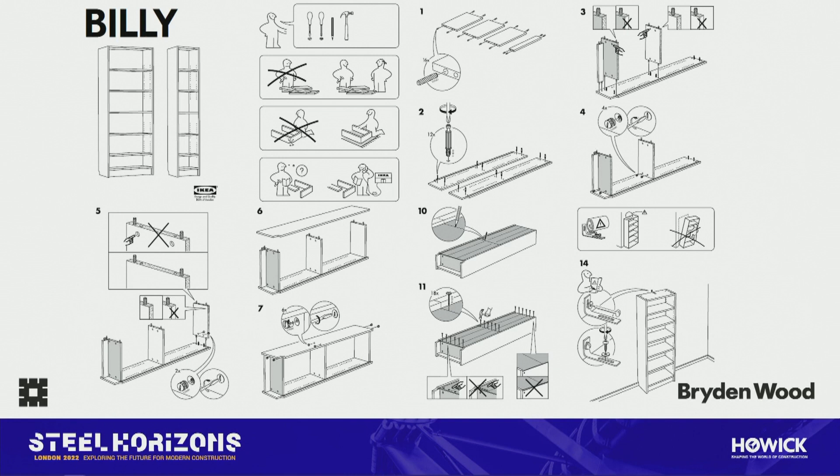No doubt many of you are aware of the Billy bookcase that IKEA has sold for years. They took the philosophy of, instead of building a bookcase themselves and transporting a large volumetric object, it was far better to reduce it down to components. This reduced the amount of storage needed in their warehouses and made it more transportable for the end user. It's simply erected when the end user takes it home, usually erected right next to the place where they need it. Bookcase, as we know, comes in several sizes, and it's generally only small components that need to be changed to alter its size and shape.

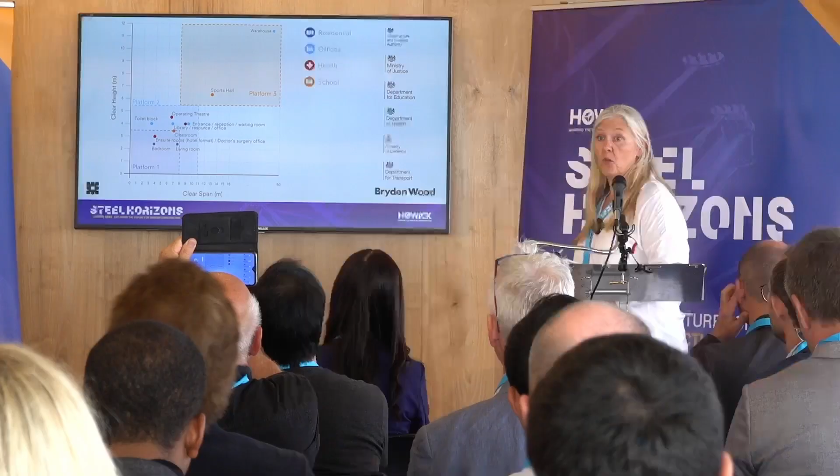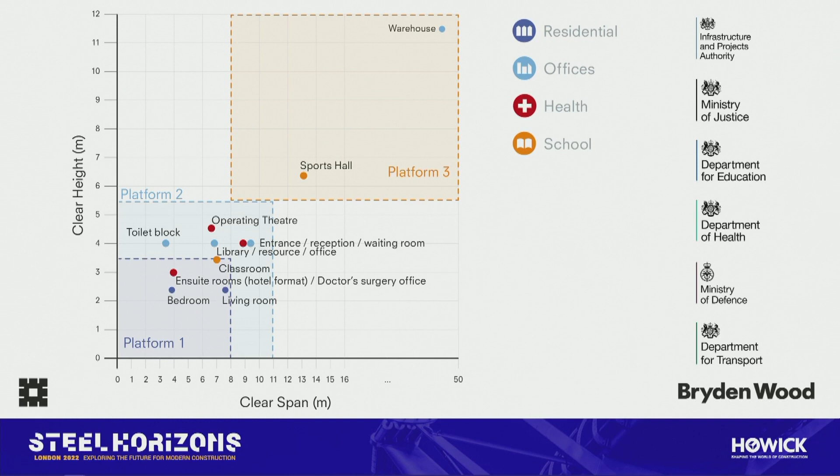So at Bryden Wood, we're taking that same philosophy and applying it to building types. Depending on the height and clear span of what's required for a particular building, it determines the type of platform that we can use. But as you can see, there's generally lots of overlap between the systems to provide flexibility.

By taking this approach, we're also in alignment with the government's roadmap for 2030. And as you see, we aim to create a kit of parts that can be manufactured in high volume and high quality.

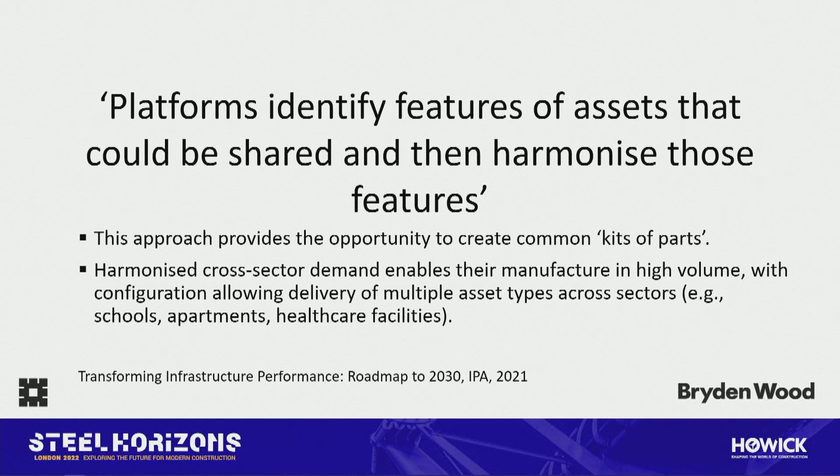But what are the benefits? So we find that we're getting less material, so the associated costs with that, the carbon, the transport, we've got fewer components. That gives us the economies of scale that we need, levels of optimization, the distributed resilient supply chains, and greater control of logistics and training on-site activities that we're all aware is quite a challenge at the moment.

And also we get standardised processes in manufacturing and assembly. So this enables us to have a diversification of the sector, so we can upskill non-construction personnel, which is very important in this market that we have, with challenges with getting the right personnel that we need. Improved health and safety, which is key. Increased productivity, reduced reliance on trades and workmanship, and promote automation.

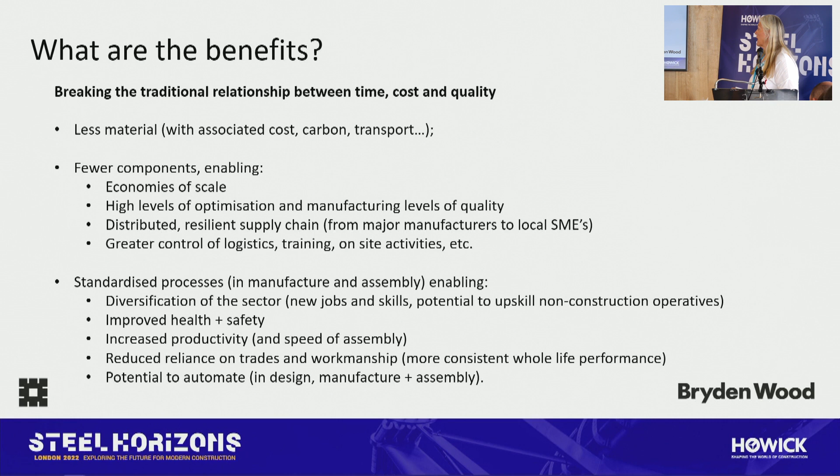So how does this actually apply in practice? Well, we are just currently coming to the end of our first project, really sort of pushing the boundaries on this in the Forge in London.

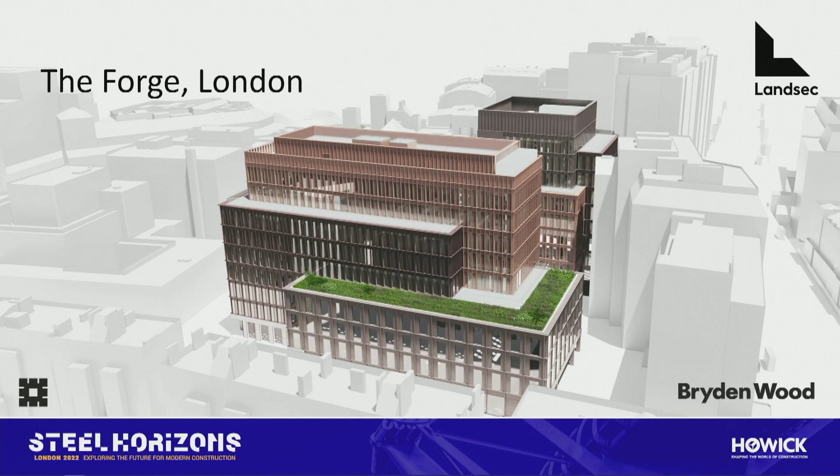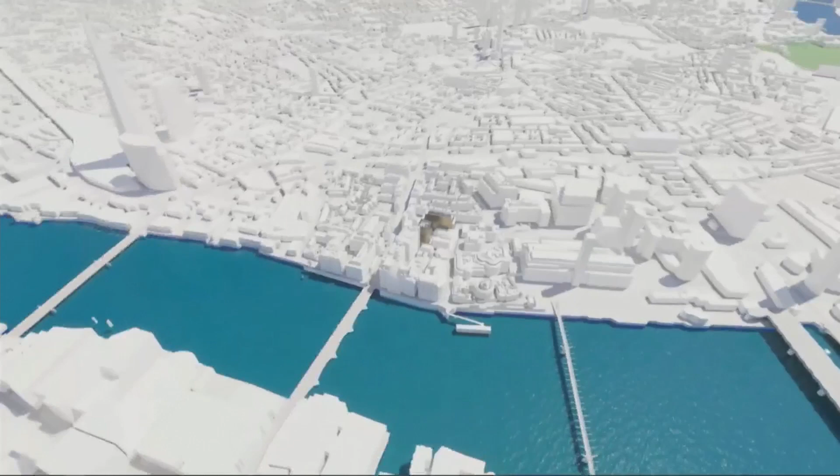The Forge is situated in Southwark, and it's a commercial building that we're just completing for Landsec. It's two buildings in a very, very tight site. As you can see from here, we are on the south bank, very close to Tate Modern, and as usual for anybody that knows construction in London, we are bound. It's really, really close boundaries on each side with really only one access.

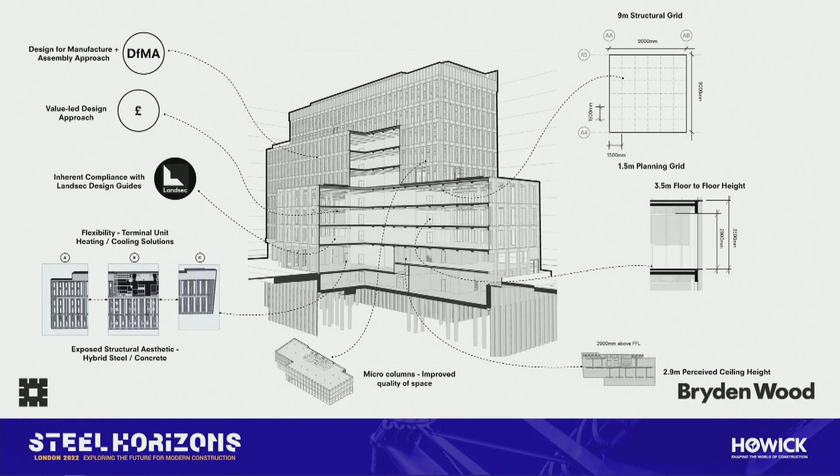So the kit of parts and the platform approach really suited this development. Not only was the approach DFMA led, but also design to value was a key driver too. We also had to ensure that we adhere to the requirements of the client, because they've got very, very strict design requirements that go to their end user. We also had a planning grid that we needed to adhere to, and also it had to be something that was flexible for the MEP that we're actually putting in it. So the platform approach really did allow us to carry on with what we needed to do.

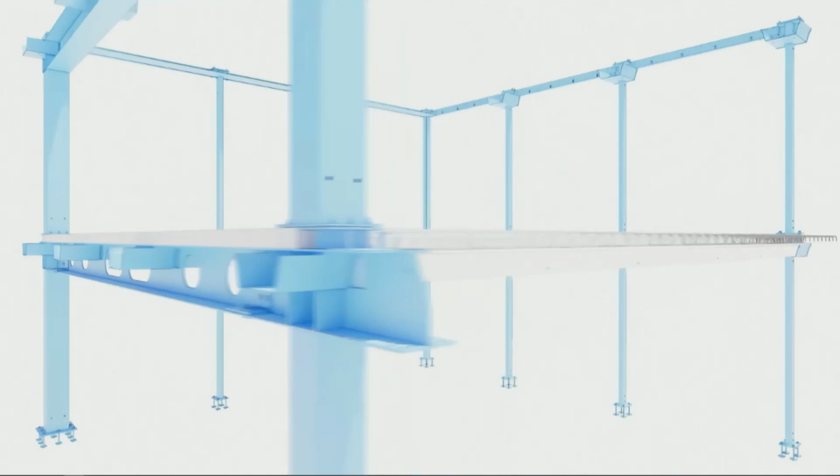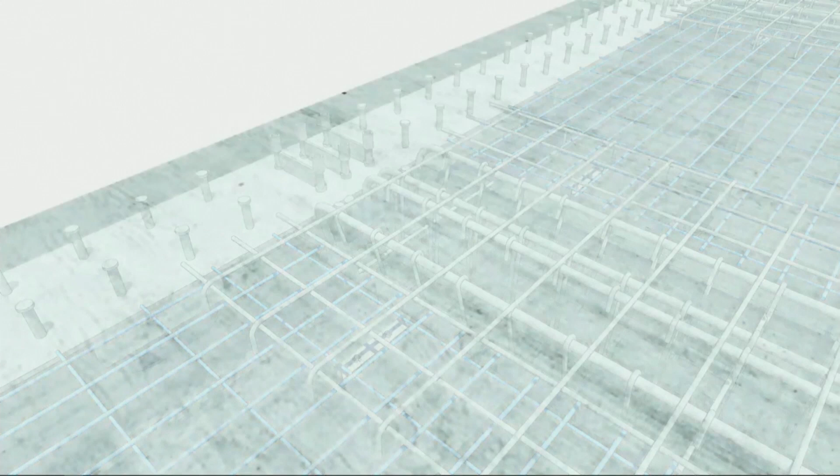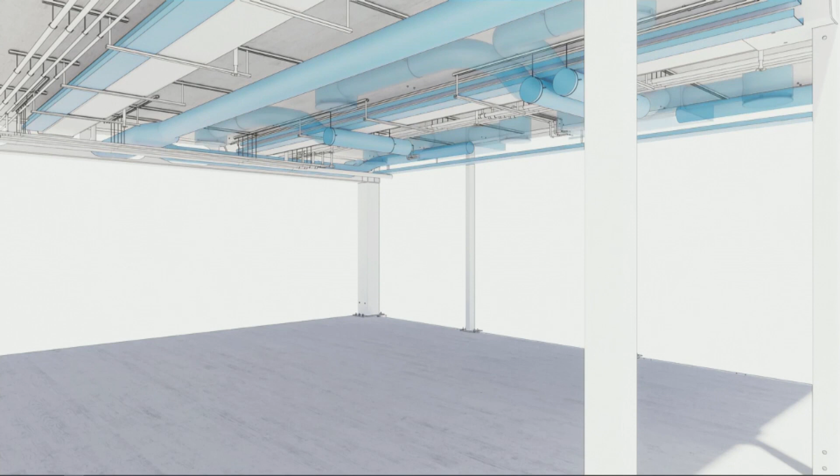So the actual system itself, the structural frame, just utilises very general construction products. The steel beams are fabricated with openings to allow the passing of services to reduce structural and services zone, shear studs to allow general composite action. But then we've got steel shoes that we actually fabricated on the beams that actually sit Comflor beams. So all that we're using is a general ComFlor lightweight decking, just in a different way, so that we've got a shutter, in effect, that we can put all the reinforcement in and just lift it into place.

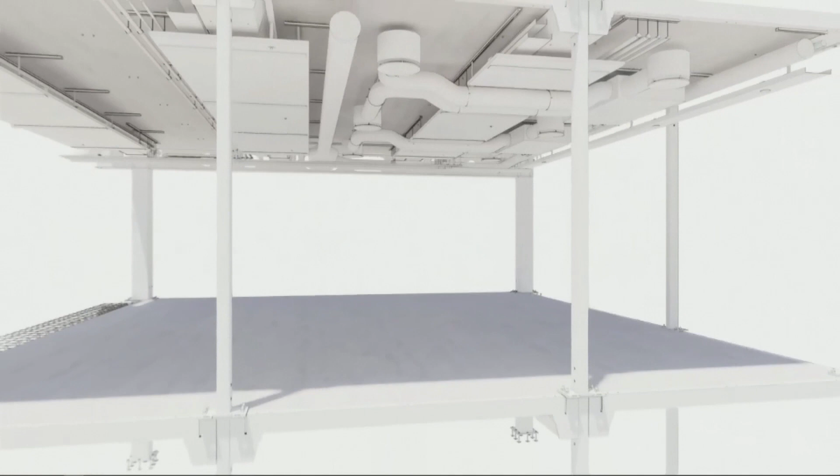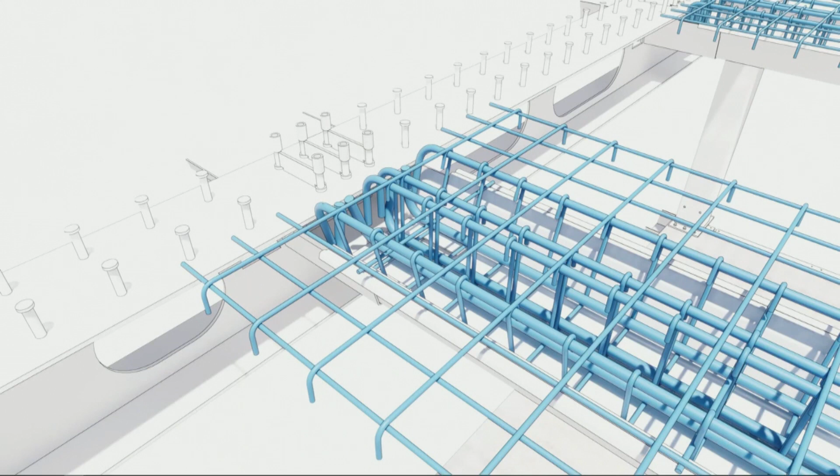Using the ComFloor in this way, the actual floor spans are reduced. So the floor slab reinforcement is then on in mesh, which actually went up with the shuttering system.

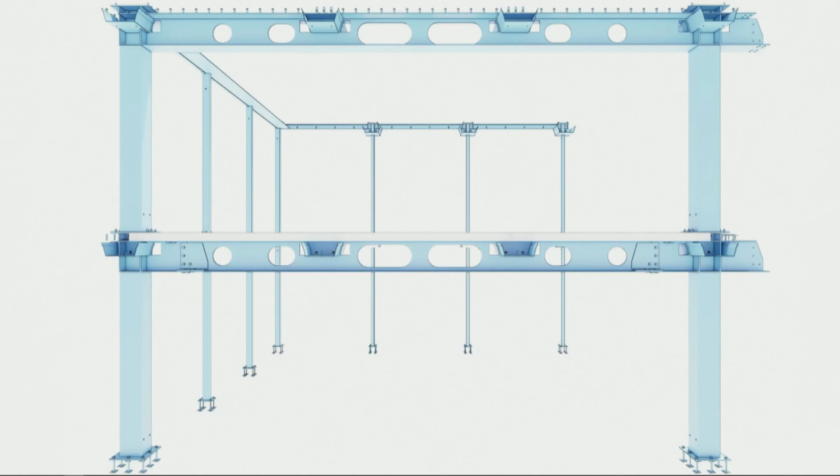The floor slabs were constructed with sockets already installed, which really sped up the MEP installation. The MEP was roughly in 4 different modules, keeping the repeatability. On an 8-storey building, this really sped things up, and once one floor was done, the operatives were straight on to the next. It was getting quicker and quicker. We've really had a lot of success with it.

Very, very narrow, but in a regular grid that was easily lifted into place. Nothing huge, and things the contractor is all familiar with. These are all construction products that we're used to every single day.

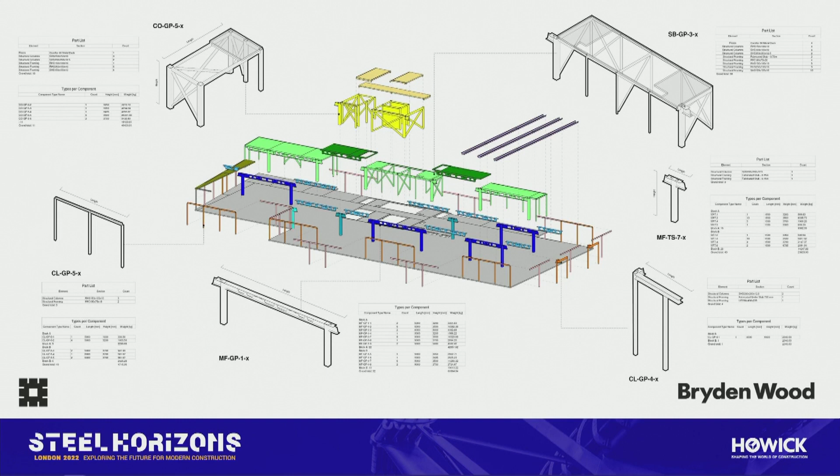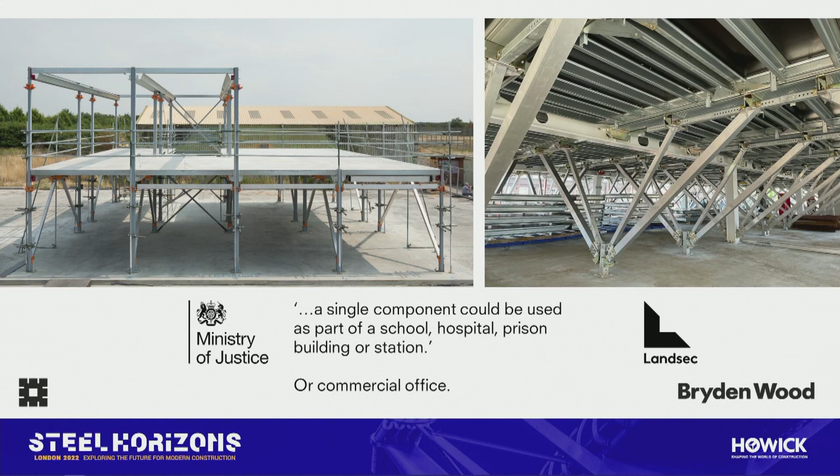As this was a new approach, we carried out several prototypes. Here on the left, you can see one of the first prototypes that we did with the actual Ministry of Justice. We worked with them to look at their prison portfolio to see how we could speed up construction for their new rollout. We actually worked with them using some prisoners at one of their facilities to give them skills and to see how easy it would be to train a non-skilled workforce, which was really great.

This image on the right is actually the forge, showing you the actual shuttering tables that I mentioned earlier. What we've done here is redesigned the shuttering to be reusable for every floor and for other buildings, but we've taken the propping back to the columns so that we're trying to speed up construction as much as possible.

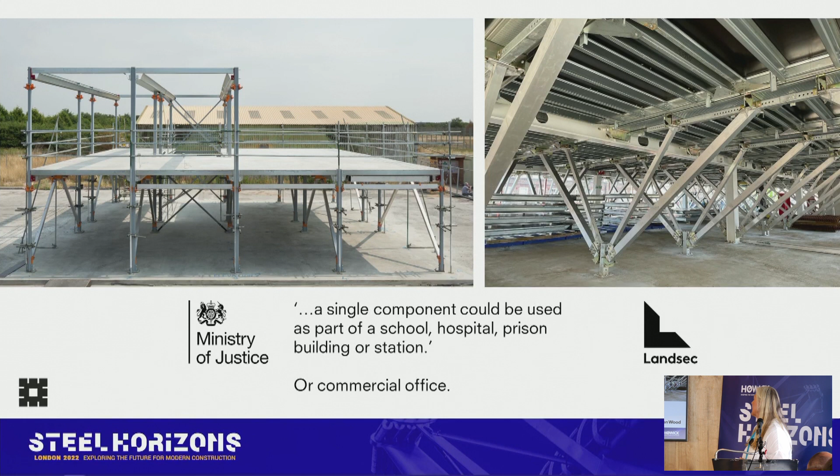This allows free open space along the floor plate, which really helps when you've got a lot going on and you're wanting to bring in materials, especially on a tight site. It gives you that freedom.

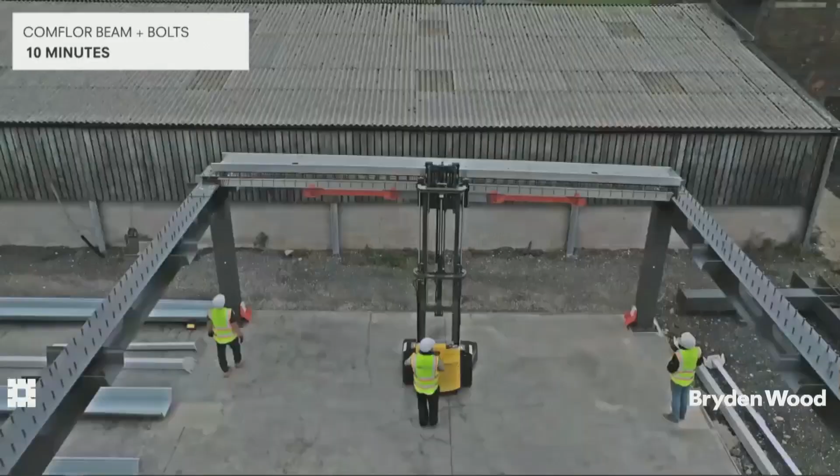Here's a video of us actually doing the prototype. These are called ridge stackers, lifting the Comflor beams into place, as you see on the shoes.

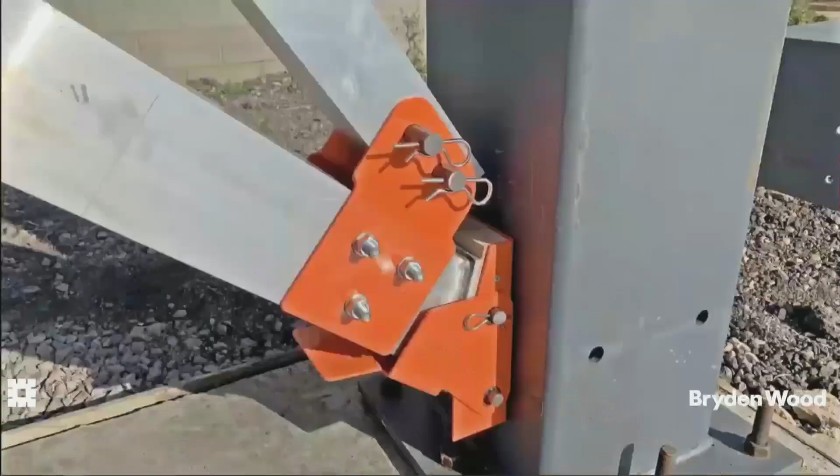The operatives putting the propping into place. As you can see, it's very light gauge steel that we're using here, with repeatable connections, so it can be put together easily and with little instruction.

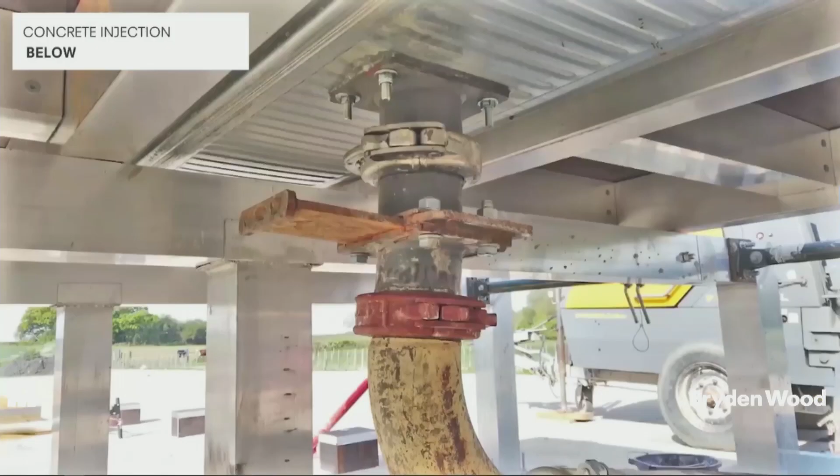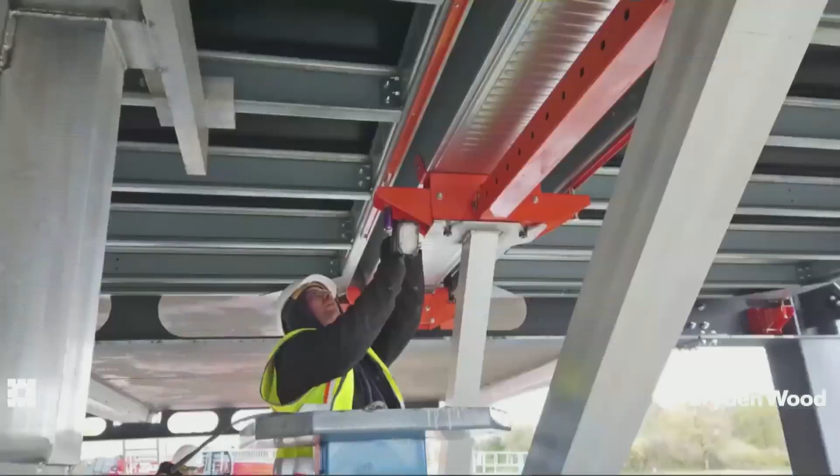These are the shutter tables going up with just the mesh on for the reinforcement. We found that actually pumping a wet mix from below was the best way to do it, to get a really nice finish, using an automated screeder. On the forge, we didn't - we just did it the traditional way.

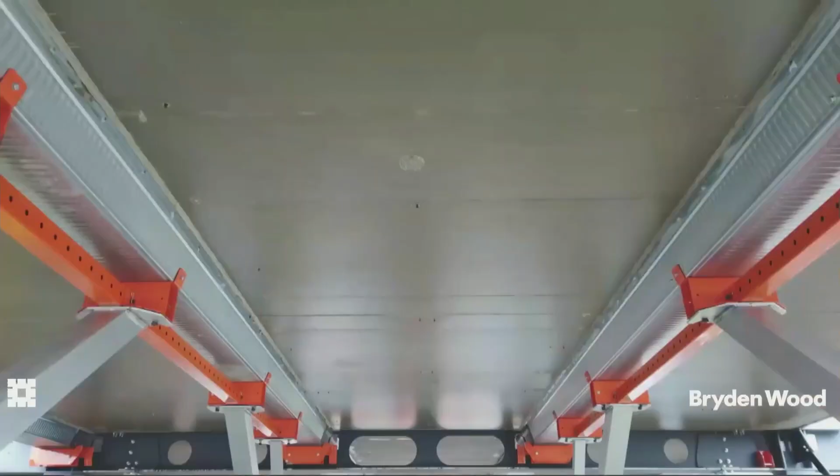As you can see, there's a lot of wet concrete going in there. You're thinking, well, why not maybe use precast concrete? We did analyse this, but you find that you're just transporting more volume to site - when we drill down to it, all this precast laid down in the yard, lifting onto a vehicle, transporting to site, lifting into position, it just didn't make sense to us. So we didn't proceed with it. We just kept to the wet concrete in that area.

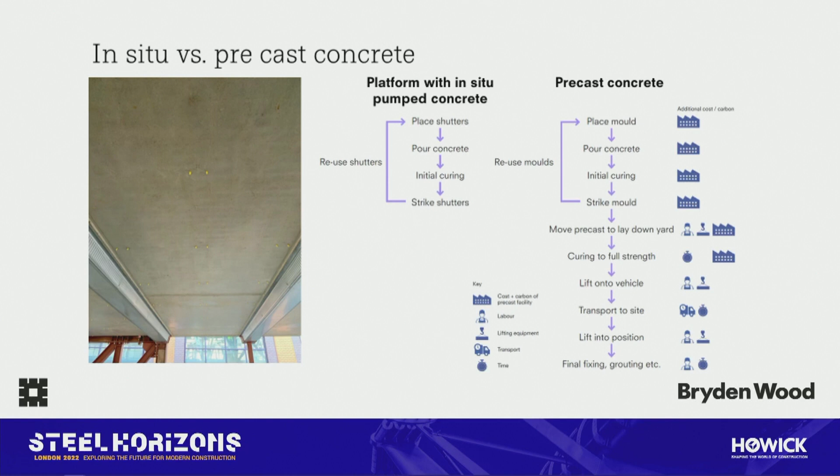The sustainability benefits are just great on this. You've got a highly optimized superstructure, so you can reduce the quantity of building materials, which gives you fewer transport movements. It has this really great knock-on effect - you're reducing your building weight, and getting smaller foundations.

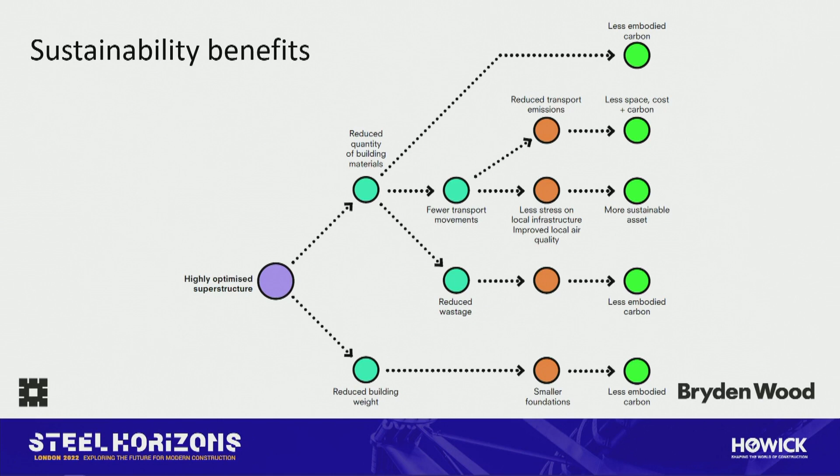Sometimes, especially when we're building in densely populated places like London, there are actually existing foundations there. You're possibly able to reuse foundations, which is great.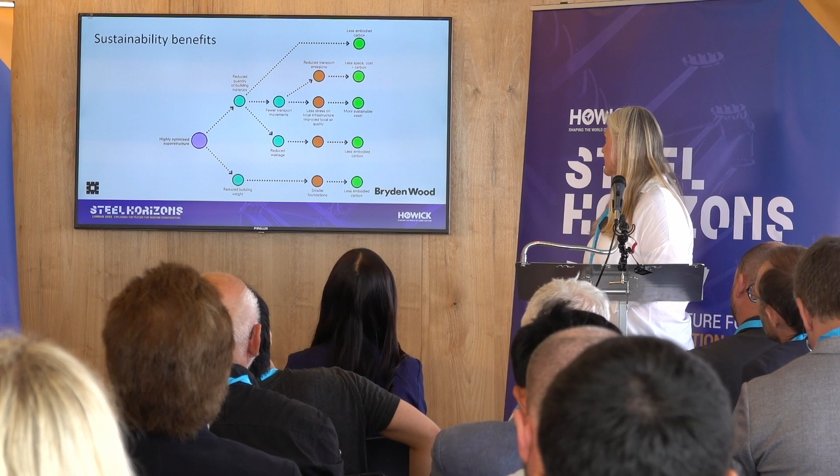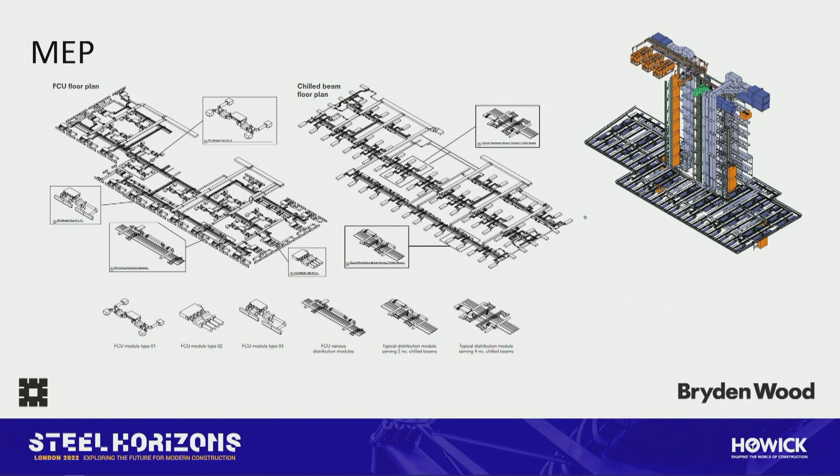Then on the MEP, we took exactly the same approach, keeping it to as few modules as we could, and repeating them throughout the building project. With NG Bailey, using their facility, we did it all off-site, so it could all be pre-commissioned to a certain stage, ensuring it could be just lift and fix, which was ultimately what we wanted. The actual components, as you can see on the far left, we tried to get them so that they could actually fit into the lorries they were going to.

That's another consideration, that you need to make sure you're not doing a great massive module that you're going to need road closures for. So everything was designed to go back in the lorry, and stacked on the slabs, going back to earlier. We wanted to get as much space on site so that we could have these deliveries made and put in place.

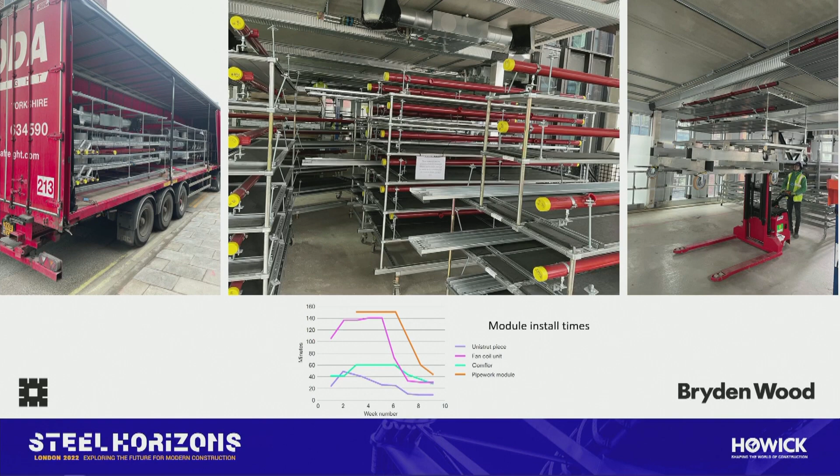As you can see from this image, it's all very densely compact, but it's making sure that not only have we got all the MEP in place and fixed, but we're also giving as much height as possible to the end user - a really important aspect.

When it came to the facade, exactly the same principles were taken. We looked at the elevations and drilled it down to about 10 elements, all componentized so they could just be picked up and installed into place.

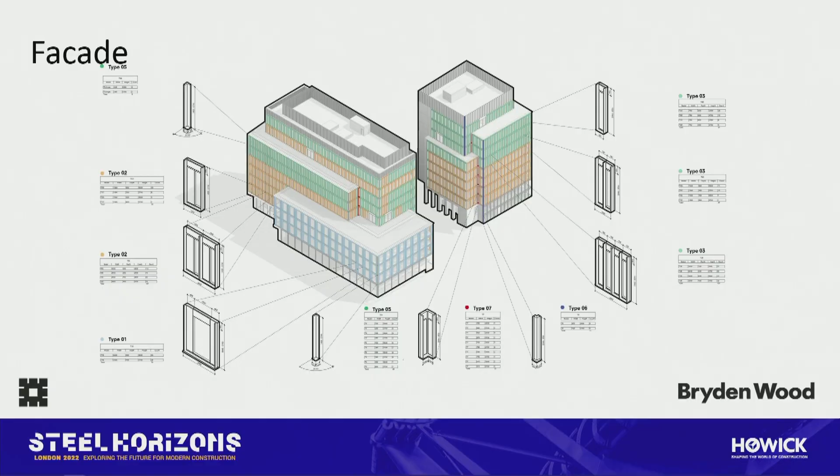We did simulation analysis with CFD to make sure that whatever we were going to do was going to result in no overheating on the building at all. So, using all the information we've got to just check everything digitally.

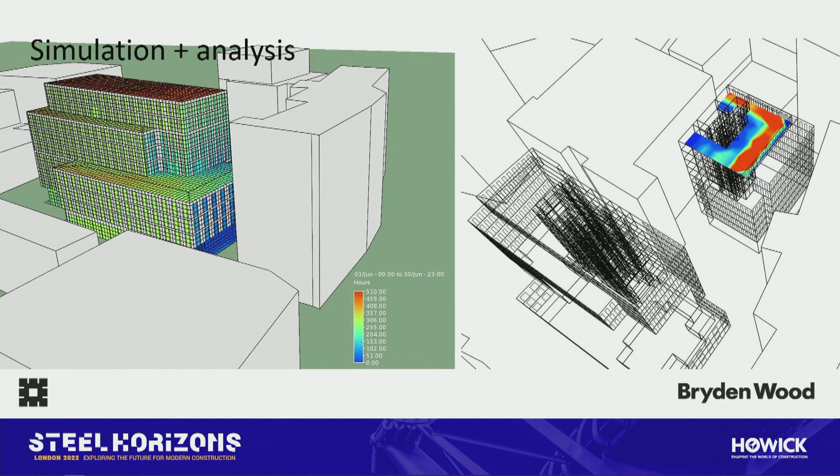There's been a lot of work in these recent months, as we've been coming more into the project, working with the University of Cambridge. We've had lots of sites with webcams on, lots of digital tools, and we're now analysing how quickly this job has gone up.

The actual panels themselves have gone up in 7.5 minutes a panel, which is great. We're also doing the analytics for the rest of the building, and also seeing how we can configure the construction process to make it quicker, and also see what went wrong, what the hold-ups were.

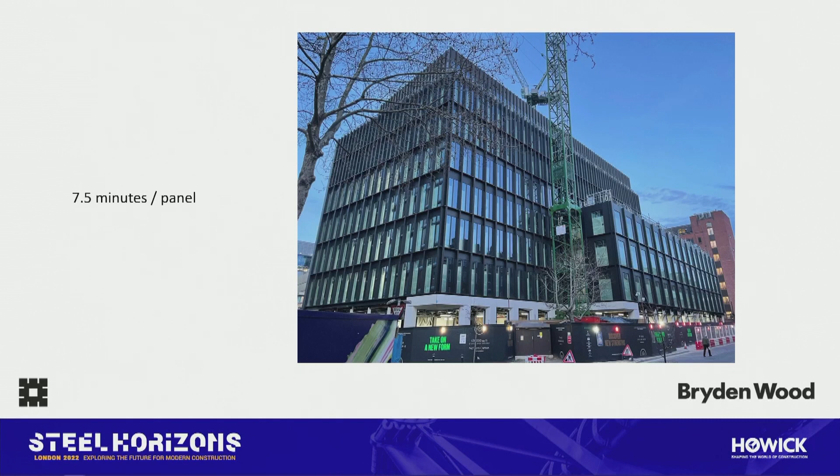This project was done during the pandemic. We had supply issues - it was definitely a major challenge, but to say that we could achieve that was quite a feat. In fact, we were waiting for deliveries some days coming from overseas.

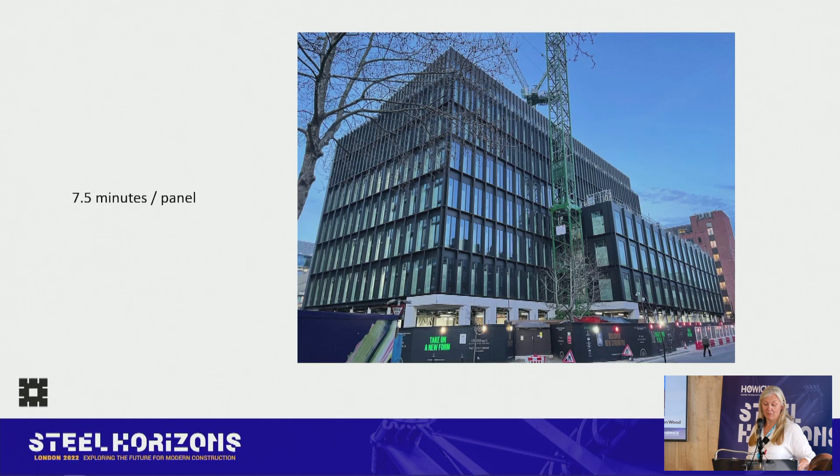So what's the chain reaction of benefit? We're finding there's a 30% reduction in embodied carbon using this approach. And this is the first net zero commercial development, certified by the UK Green Building Council - something we're really, really proud of.

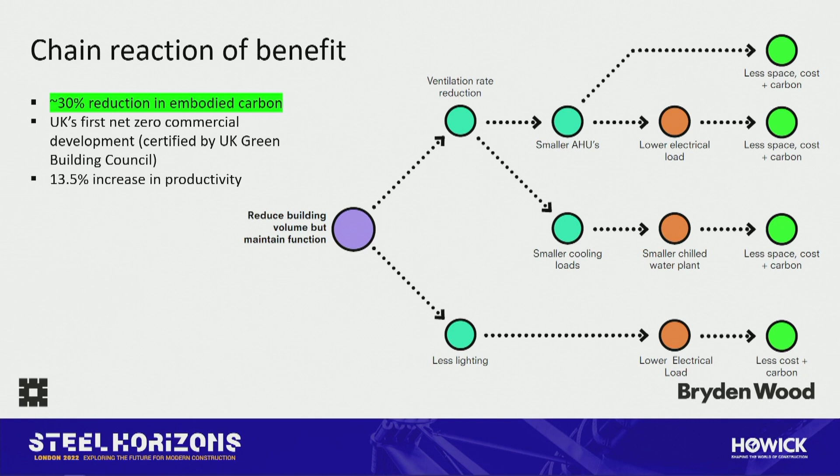We're finding that with this approach there's a 13.5% increase in productivity. We know there's lessons to be learnt, but it shows that it's a positive move for the industry.

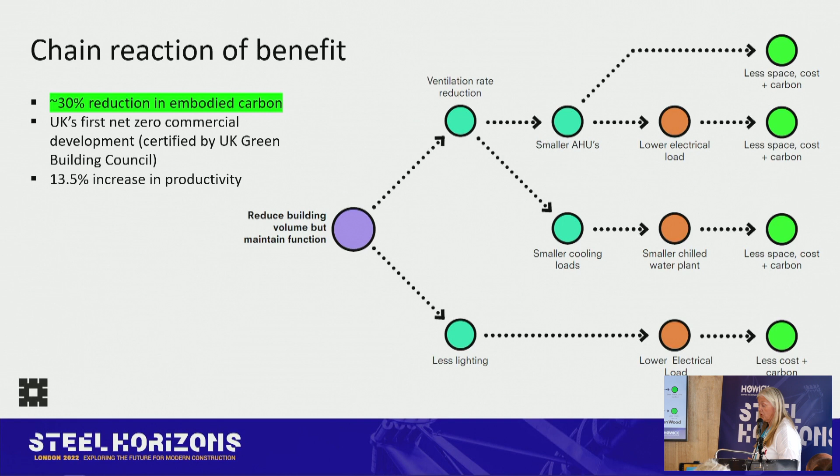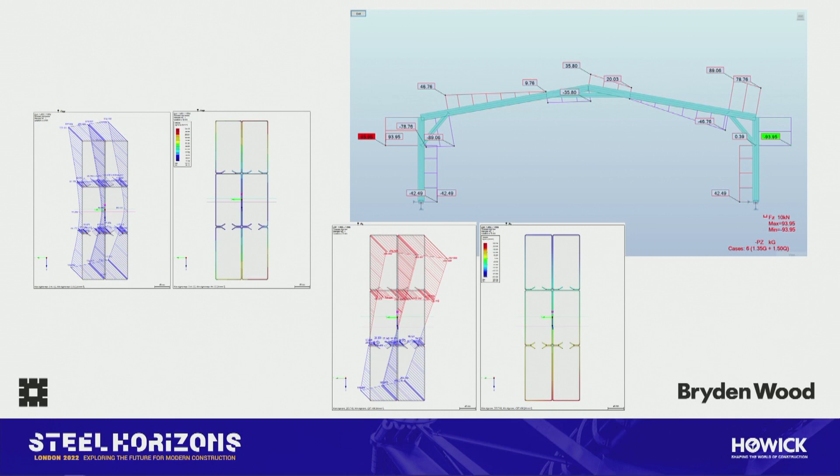So, obviously, we're working with Howick, and it's been great, we've really enjoyed it. But what have we been doing there? Howick asked Bryden Wood to study the feasibility of using their products in a steel portal frame building.

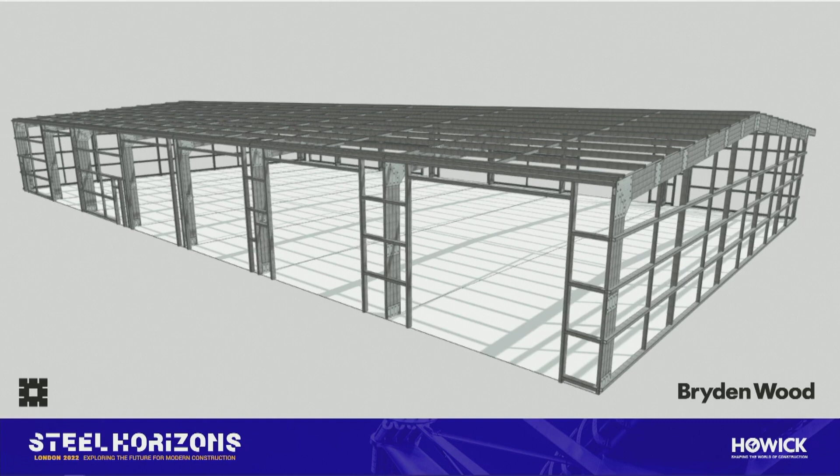As part of this, we found by analysis using their sections in a different way that we could actually achieve up to a 24-metre span of varying lengths, generally in a 5.5 metre base span, which is really great. It's just using the product that's already out there and thinking about it differently. Speakers prior to me are doing the same thing - it's a ready, available product, which is great.

By doing this, you get an efficient, lightweight frame. The positive knock-on effects are smaller foundations, which is no small thing when a lot of construction money is lost in the ground. It's also less weight for transportation costs, compared to a traditional steel frame. It was just great to collaborate with Howick on this to see what we can do and take this further.

So, well, thank you very much for listening to me. I hope it's given you a bit of an insight into what we're trying to do. Thank you.

Thank you, Nicola. I have got a question. That's all right, I don't know what to do now. All prepared for questions, really. Hold on, this is my moment of truth. Here you go.

Hi, I'm Sam Stacey from Innovate UK, and I know a lot about the Forge buildings - we sponsored it. But I was interested by your productivity figure, which is in the right direction, but I would have expected a greater improvement in productivity. What are your thoughts about that?